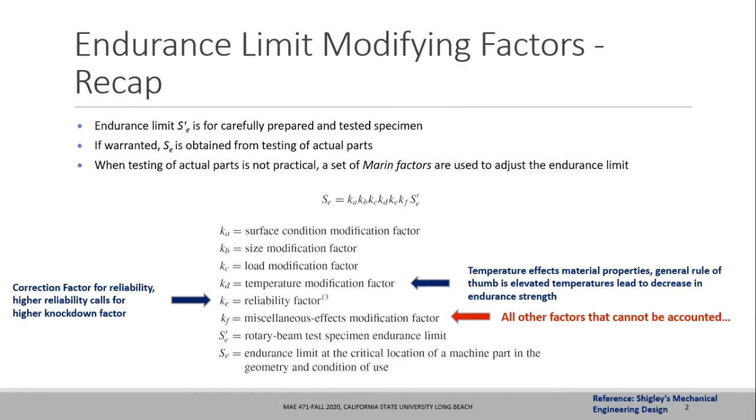Okay, so the next thing we would like to recap is about fatigue life estimation.

As a designer working with specific components subjected to cyclic loading and unloading patterns, the most important question is how long a component will last in service. In other words, what will be the number of cycles to failure for a given component.

This is one of the most powerful equations to calculate the number of cycles to fatigue. This formula only works if your cyclic loading pattern follows a completely reversible pattern, meaning equal amounts of positive and negative stresses, so the mean of the variation is zero. Then you can use this formula to calculate the number of fatigue cycles a component can withstand under specific conditions.

This formula tells you how long a component will last under a given cycle of reversible stresses. Here, sigma reversible denotes the amplitude of these stresses, divided by constant A and raised to the exponent 1 over B, where A and B are functions of the material properties.

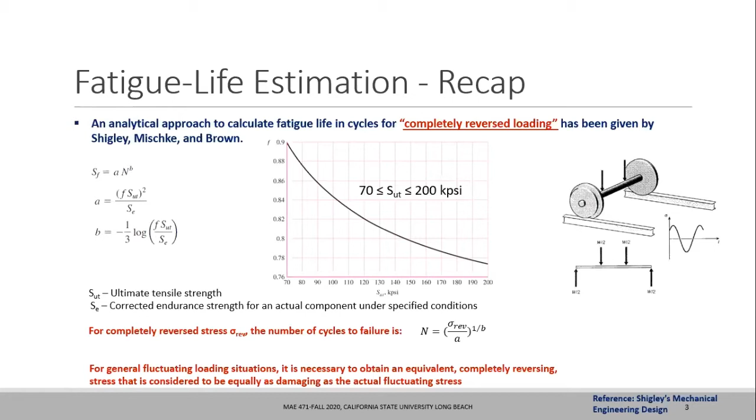But unfortunately, this equation only works when we have completely reversible stresses given to us. In the more generic case, when that is not given, we will see how that equation can be modified so we can still use it to find the number of cycles to failure.

Before that, there's another important slide that recaps the fatigue failure criteria we have learned. Just like in static loading, where we have Tresca criteria, von Mises criteria, and maximum normal stress theory, there are many theories explaining failure. Similarly, in fatigue there are several theories, but the most commonly used fatigue criteria is called the modified Goodman criteria.

What it says is: if you plot the alternating stress amplitude on the y-axis and the mean value on the x-axis, then you plot a straight line connecting the endurance strength on the y-axis to the ultimate tensile strength on the x-axis. That line is called the modified Goodman line, and it defines the envelope of fatigue failure.

Any point that lies within this line is safe. Any point that lies outside this modified Goodman line is unsafe, meaning failure will happen.

You know how to calculate the amplitude and mean. If you are given a specific cycle of stresses varying with time, you can calculate the amplitude, which is the amount of deviation from the mean. The mean is calculated by the average of the maximum stress and minimum stress - take the average and you get sigma mean, or the mid-range component. Once you get the mid-range component, the amplitude is simply sigma max minus sigma mean, or equivalently sigma maximum minus sigma minimum divided by 2. The amplitude is half of the total range of the variation of the stresses.

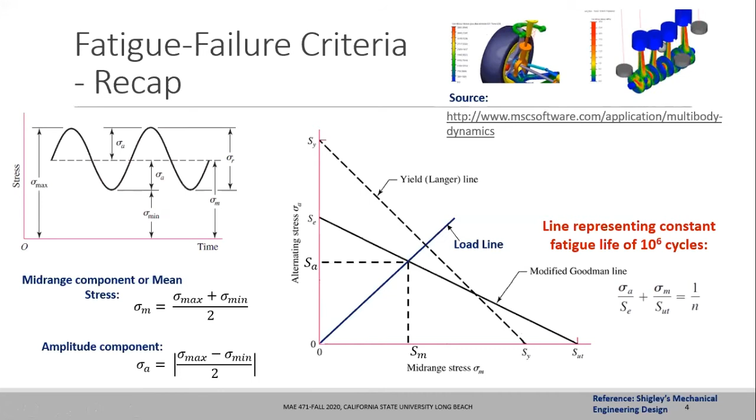Okay, thank you. Yeah, welcome. Please look at the slides. Look at this slide and let me go to the next one, and let me know if you have any difficulty understanding any of the parameters mentioned in this.

And let me know as well if everything makes sense to you. If you guys are completely comfortable with whatever has been mentioned here, let me know as well, please.

Could you go over what the modified Goodman line is again? Sure. So the modified Goodman line is basically saying that if I plot this point A, do you understand what point A is here? Yes. But before we discuss anything, can you identify yourself so I know your name? James. So you know how point A is plotted, and it basically comes from the simulation values, right?

Right. Now if point A is lying beneath this line, on the left side towards the origin, then I know my material is safe, it is not going to fail under fatigue loading. But if point A is lying somewhere near point C, then my failure will happen, fatigue failure will happen. So this modified Goodman line is the boundary between failure and non-failure. Okay, gotcha. Yeah.

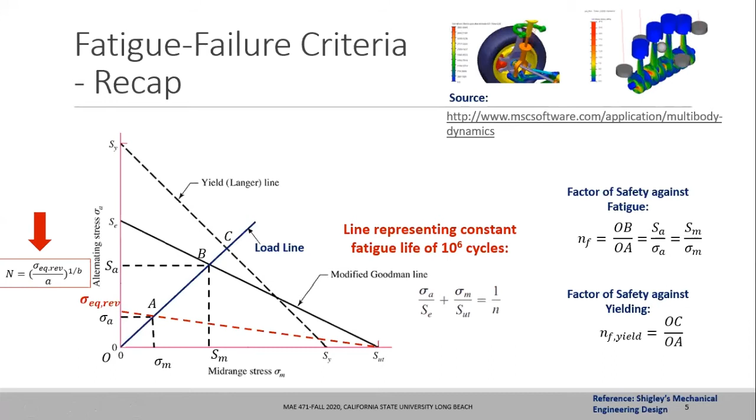Okay, so now we actually switch the discussion to more qualitative discussion about the design of transmission shafts. So far we have seen how fatigue loading on a material causes failure, and what type of strength degradation takes place. The specific strength parameter we need to use in fatigue is called endurance strength.

Then we have seen how to use the modified Goodman line and how to calculate the factor of safety, and also how to calculate the number of cycles to failure. We will use those concepts to decide the geometry of a specific component, and that specific component we are now looking at is transmission shaft design.

So how is a transmission shaft basically designed — how is the diameter of the specific shaft determined, and what type of materials are generally selected? These are some of the considerations we will first go through, and then we'll see how to use those calculations to determine the transmission shaft diameter for a given application and load situation.

When we talk about design of a specific component, these considerations remain the same for any machine component — whether it is bearings, gears, pulleys, belt drives, chains, or anything else we will look at specifically in 472, whether it's suspension or springs. You will see that the design of those components follows consideration about the choice of material.

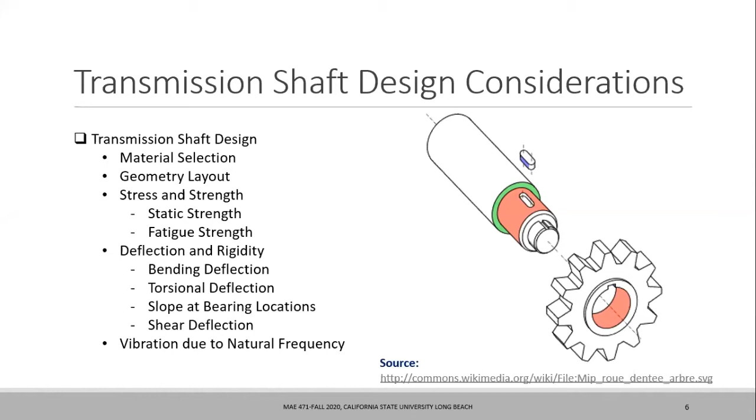Since the transmission shaft specifically is under dynamic load, we also have to be considerate about vibrations due to natural frequency — what type of resonance can take place, and what is the critical speed we have to be careful about, such that the transmission shaft does not undergo resonance. So those are some of the things we'll be considering in designing transmission shafts.

So first, let's talk about material. Material selection is the first step in any design process. And when I say it's the first step, it does not mean you have to have a complete picture, or that the final choice of material is done at this point.

Design is always iterative in nature. You choose a material, then apply stress and strength calculations, apply the loads, and find the factor of safety. If you feel those factors of safety are not sufficient, that the material doesn't have proper strength, you have to go back and change the material.

Strength and stress calculations are not the only parameters for material selection. Other criteria include the weight aspects, manufacturing aspects — how easy it is to manufacture a component with that material — then price, availability, and the stiffness of it. If you feel it's deflecting a lot, that means it doesn't have the proper stiffness or rigidity you need.

So a lot of factors go into deciding the choice of material. And again, when you decide on a choice of material at the first instance, that doesn't mean you cannot change it. You can always go back to your design calculation and change the material — that's what we call the iterative design procedure. Design is always iterative in nature; you have to go back and forth and make iterations.

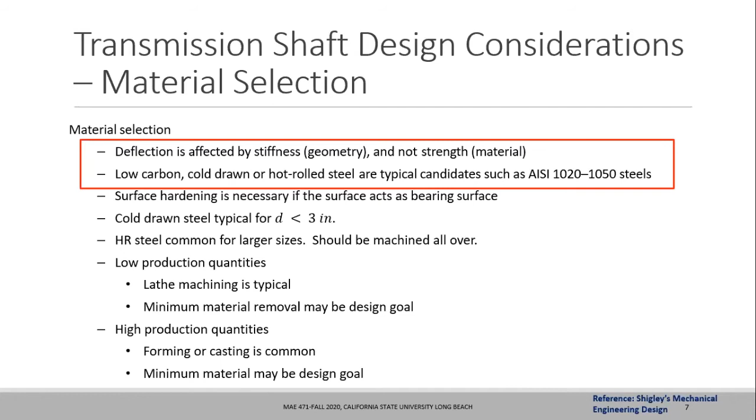So we've now come back to the transmission shaft diameter calculation. Once we have selected a material, we know the endurance strength, ultimate tensile strength, and other parameters to consider. So the next question is, what should be the diameter of the shaft for a given application? How do I know whether I need a 2-inch, 1.5-inch, 3-inch, or 4-inch diameter?

In this process of estimating diameter, we need to do the calculations we have just seen. It will be the same, or similar, calculations. First we know that the transmission shaft is being subjected to cyclic loading.

The transmission shaft is not subjected to static loading. It is subjected to cyclic or fatigue loading, because the shaft keeps rotating and it is also withstanding bending loads. So we know it undergoes fatigue loading, and we know what should be the amplitude and the mid-range component. We can calculate that.

When we talk about the transmission shaft, generally it has a bending moment and a torque, and each of the bending moment and torque will have its amplitude component and mean component. So here, sigma A is the bending stress, and Kf is the stress concentration factor.

This is M times C divided by I. C represents the distance from the neutral axis, so it's just the same formula we use to calculate bending stresses. M subscript A denotes the amplitude, and M subscript small m denotes the mean or mid-range component.

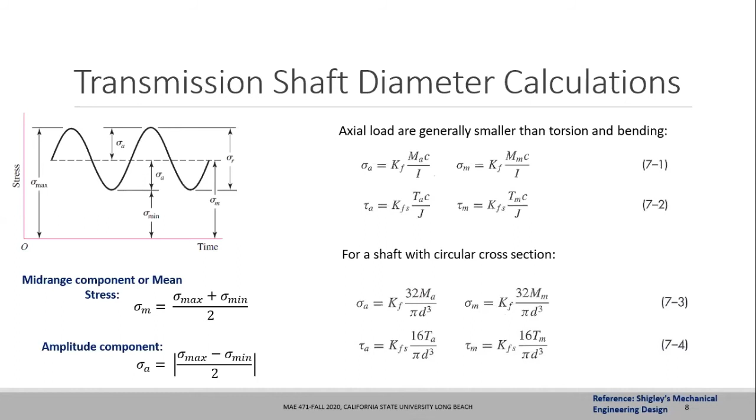So I'm going to discuss next what this KF or KFS basically means, and how we get to know what these constants are, because these are called the stress concentration factors. We have not been using these in our calculation so far, but we'll see that in fatigue especially, these factors play a pivotal role, because the stress concentration will change the factor of safety as well. So let's discuss what stress concentration factor is.

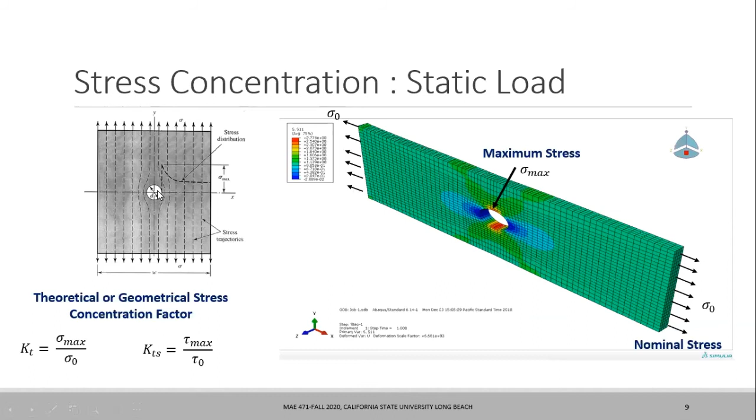Similarly, if you have a notch, it will have a different formula. So depending on the geometry of the discontinuity, you will have different stress concentration factors.

In the case of a transmission shaft, we have similar situations where stresses will be concentrated. A typical transmission shaft is always in a stepped construction, meaning it has a bigger diameter, then a smaller diameter, then a bigger diameter again, and so on, with different diameters and lengths.

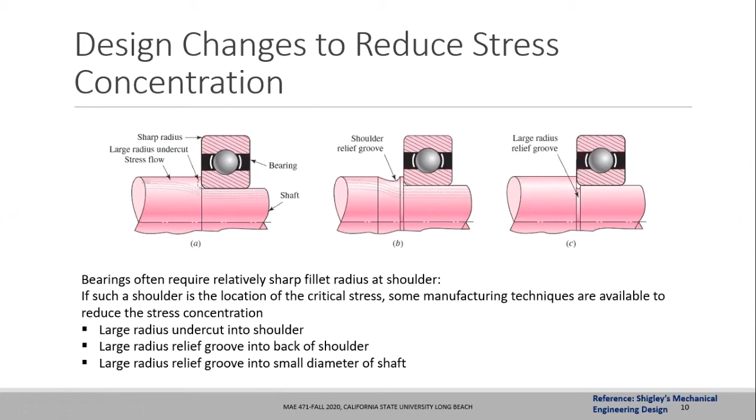Does it make sense, guys? Yeah, it does. Great.

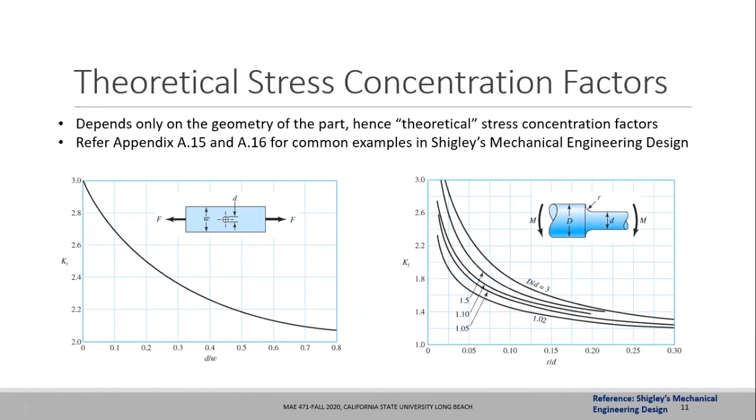Let me know if this makes sense to you guys, or if anything here does not make sense, please let me know and I'll try to explain it again.

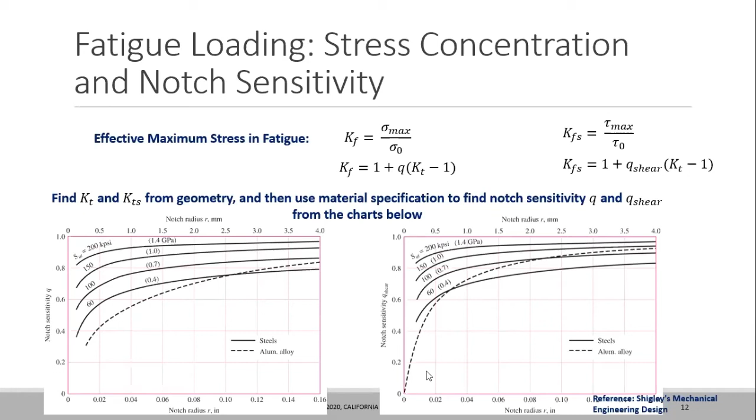So in all these expressions, the unknown is your transmission shaft diameter. Everything else is known: the factor of safety you're going to apply, the endurance strength, the ultimate tensile strength since you already selected a material, the bending moments applied, and the twisting moments applied. So everything is known except the diameter of the shaft.

MM is the mid-range component, mean of the bending moment and mean of the twisting moment, and KFS is the stress concentration factor for fatigue under shear loading. KF is the stress concentration factor for fatigue under normal stresses. So if you plug in all those numbers, N is your design factor of safety, you can find what should be the minimum diameter needed for the given application. So this is one method of calculation.

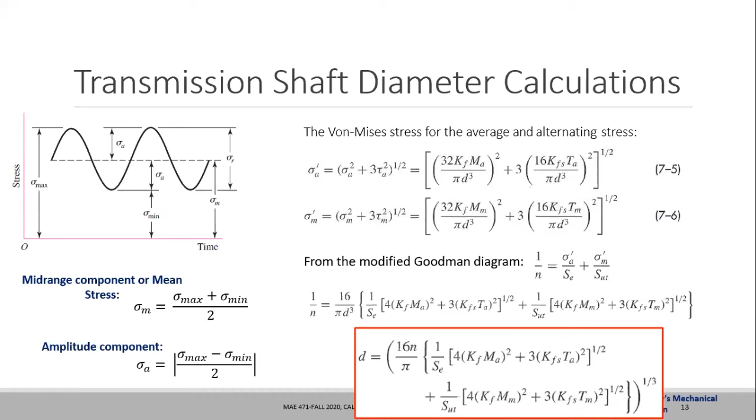Okay, assuming everybody is following it. Now, I'm making this easier for you guys: for the transmission shaft, generally the M subscript M is 0, that is the mean of the bending moment is 0, and the amplitude of the torque twisting moment is 0. So what remains in the long expression is only these two terms.

So diameter can be calculated using this simple expression, where 16 is a constant, N is the factor of safety, pi, Se is your endurance strength, 2 times Kf is the fatigue stress concentration factor, Ma is the amplitude of the bending moment, SUT is ultimate tensile strength, root 3 times KFS is the fatigue stress concentration factor for shear loading, and T subscript M basically means the mid-range component of the applied twisting moment.

So if you have a transmission shaft that is subjected to bending moment and torque, the bending moment basically means it is M_a, because M subscript M is 0, and the torque is given by T_m because T subscript A is 0. What this basically means is that the twisting moment is a steady state torque, and the bending moment is a completely reversible bending moment applied to a rotating shaft with constant bending moment and torsion. These are the simplifications you can make, and the long expression for diameter you see at the top actually becomes this simple expression here.

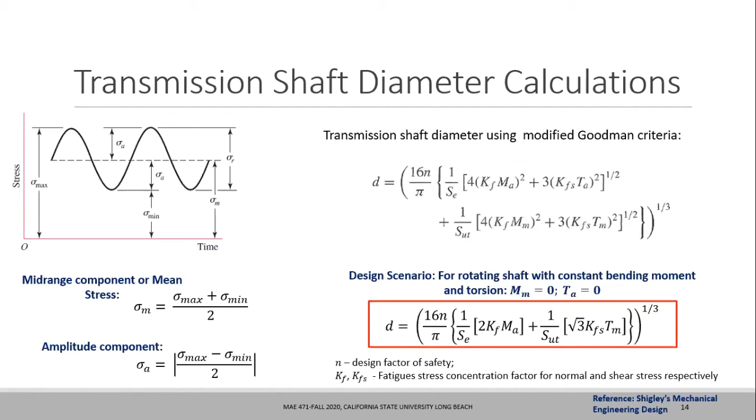Yes, yes, great. So having seen the choice of material and the diameter required for a given application, now here are some guidelines or considerations for layout - how it should be laid out and how different components are mounted on the shaft. Generally the layout to accommodate shaft elements, basically the gears, bearings, pulleys that are mounted on the shaft, needs to be decided at a very early stage, because that defines how the bending moment has to be calculated and how the twisting moment has to be calculated. So some information about the placement of the gears or bearings needs to be known beforehand.

As I mentioned, this is a transmission shaft for a specific gearbox, and you see it is basically a stepped construction. You have one diameter, then a bigger diameter, then another bigger diameter, another step. I believe that is not a step, it is a hub, and the step is only this much. This transmission shaft goes like this, and then you have probably another step and it goes like this. So this is basically a step geometry. The transmission shaft, in any construction or application, always follows the stepped geometry.

And the reason it follows step geometry is because you have different components - here the bearing actually gets located axially because of the step in the construction. So if you have a step in diameter, the bearings and gears get a means to locate in the axial direction.

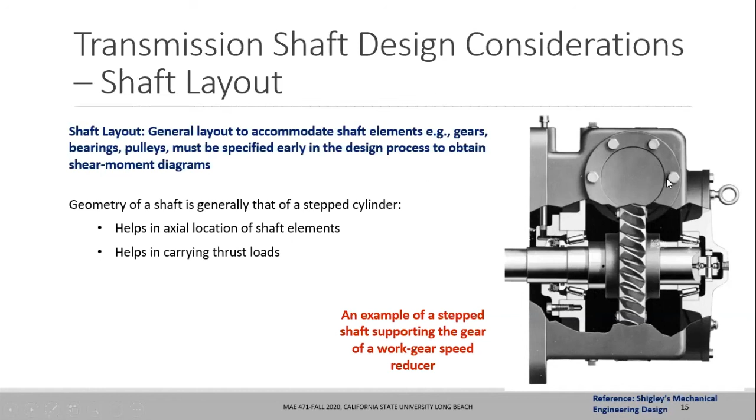Some other considerations: generally a good layout has the transmission shaft laid out such that the bearings are located at the extreme ends and the gears are located between those two bearings. Generally you don't want more than two bearing supports for a transmission shaft, because if you have more than two, you get static redundancy and it becomes difficult to calculate reaction forces. So the rule of thumb is to use only two bearings, unless the shaft is long enough that you need a third.

As much as possible, ensure the bearings are at the two opposite ends, and all the other power transmitting components are placed in the middle between the two bearings. If that's not possible, such as when you have pulleys and sprockets, those become a cantilever arrangement - you have bearings here, this is a fan, and this is a pulley or sprocket, a cantilever arrangement. But make sure the overhanging portion of the shaft is as little as possible, because otherwise there will be excessive bending deflection. So make sure the overall shaft length is smaller and the overhanging portion is also smaller.

Those are some other design considerations that come into picture when working with a specific choice of transmission shaft for a given application. Guidelines differ from application to application, so for a specific application you need to consider what specific guidelines apply to the layout of different components on the shaft.

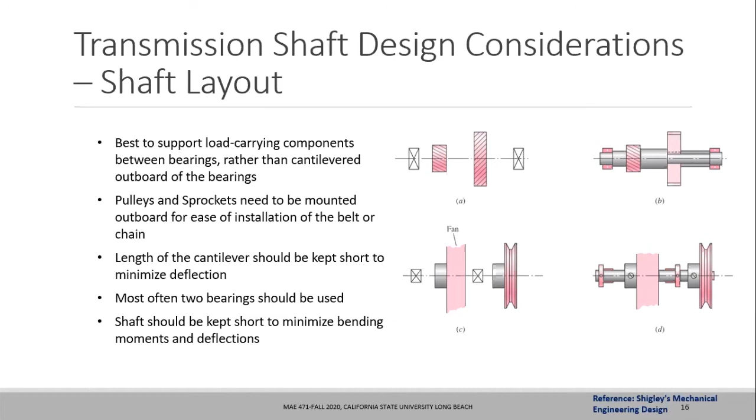Another consideration: axial loads that are going to be transmitted must be carried through only one bearing. It is good practice that only one bearing should carry the axial load.

Due to temperature changes, consider this transmission shaft here with a blade as a mowing spindle, a machine spindle. You have a blade mounted over here, a shaft, and bearings located at these two positions. This bearing is completely encased, it cannot move left or right. But this bearing is free to move on the left side, though not on the right side. The reason for this axial flexibility to move in the left direction is that if the transmission shaft gets hot, it will elongate. If the bearings don't allow it to elongate, seizure will take place and there will be deformation of the shaft. So the rule of thumb is to allow some axial motion or flexibility for the transmission shaft so it can elongate or compress depending on temperature changes.

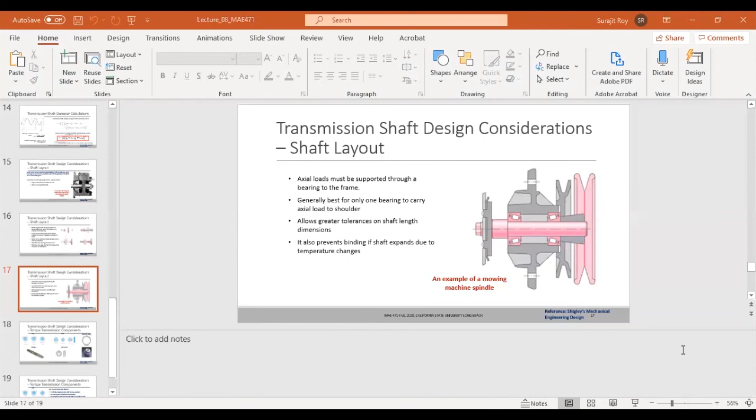Does it make sense, guys? Yes. Let me know if you have any questions so far, guys.

Any questions, guys? Can you go over that again, Professor? I have a question as well. Someone asked if you could go over it one more time, and then I have a question in relation to it as well.

What I was basically saying is that when you are mounting the bearings for the transmission shaft, you have to make sure the bearings are arranged such that they allow free movement of the transmission shaft in one direction. Because if the bearings get stuck and don't allow the elongation of the shaft, then seizure will take place. The shaft will seize at its own place and have permanent deformation and failure of the component.

So that means if there is elongation happening, the transmission shaft can elongate because of excessive temperatures in the machine or material in the assembly. Does it make sense? Yes, and what was the second question you were having? I was just confused by the explanation, but it makes sense now. Okay, got it, thanks.

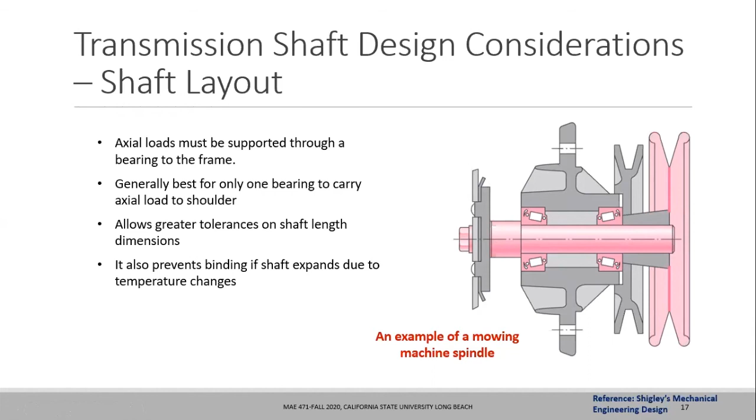I believe the last part of this transmission shaft design consideration is the different types of pins and keys, or torque transmission components - basically how to connect two pieces together. So if you're mounting a gear, how will you ensure the transmission shaft and gears are connected together? There are different components like keys and pins, set screws, splines, that allow the gear, pulley, sprocket, or any other component mounted on the shaft to rotate along with it.

So the transmission shaft is rotating, and any component mounted on splines, for example, will also rotate at the same speed or direction. You can have an arrangement like keys - rectangular pieces of material that connect the inner material with the outside. The inner material is your transmission shaft, the outer material is a gear or a pulley, and they are connected together using this key, a small piece of material connecting the two components.

If you're mounting a specific gear on a shaft, there is friction, but you cannot rely on friction for high speed or high torque applications. If you're relying only on friction, which happens with set screws, and there's insufficient friction, there will be relative slippage. To prevent slippage, you can use splines, keys, or pins.

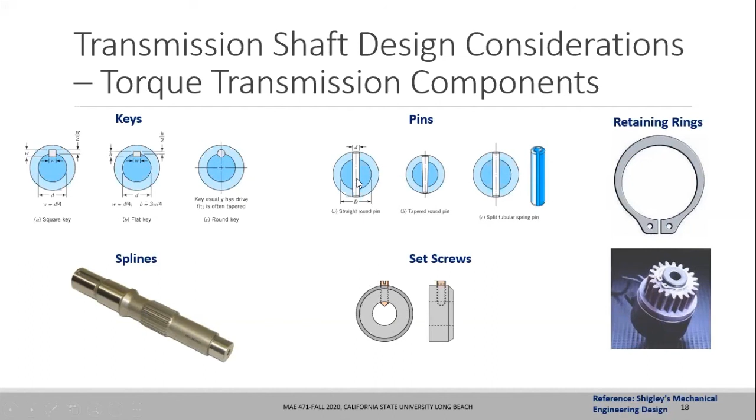Splines are generally used when you have very high torque transfers, and they are more expensive to manufacture than keys. Keys are generally the preferred choice to connect two parts together, and the reason is that keys are relatively inexpensive.

Suppose you have a high torque application, then keys are the first to fail - keys act like a fuse wire. So in case there is high torque transmission happening, the keys will fail, just like the tipping point of a fuse that will snap. You can always replace the keys because they are inexpensive to make, produce, or fabricate. This helps prevent failure of either the transmission shaft or the gear or pulley mounted on it.

Generally keys are the preferred choice of connection points or torque transmission components between a gear, a pulley, and the shaft. Splines are used as well, but they are generally difficult to fabricate and manufacture, and more expensive. They are generally used when you have very, very high torque transfer taking place. So those are some of the pros and cons of using specific transmission components for transmitting torque from the transmission shaft to another component.